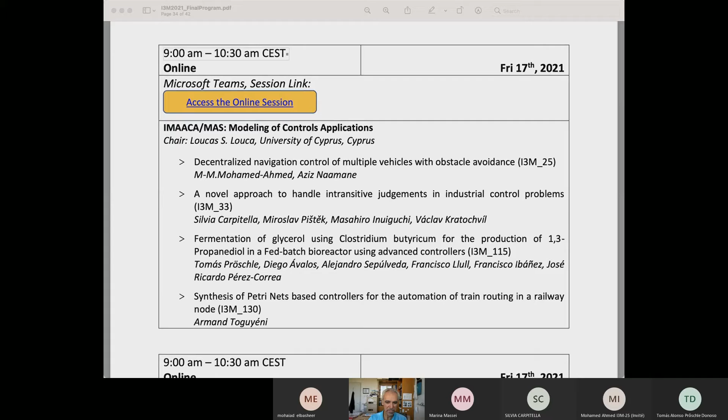Good morning, ladies and gentlemen. My name is Mohamed-Ahmed. I will present the topic with obstacle avoidance. This paper prepared by Mohamed-Ahmed and Aziz Naamane, University, Laboratory of Systems. This presentation is divided.

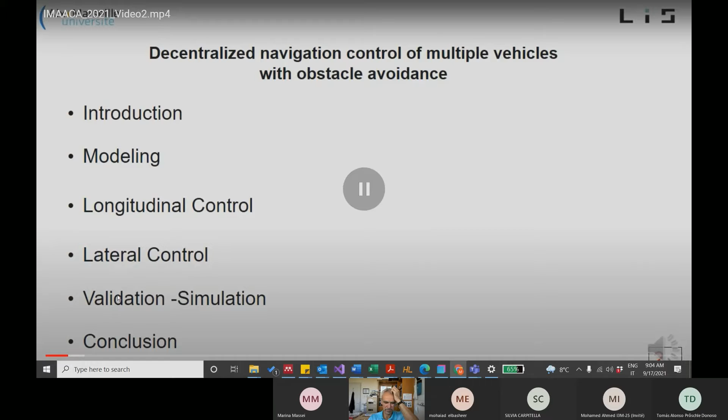Good morning, ladies and gentlemen. My name is Mohamed.

Okay, I think we're ready to start. Hello, everybody. Good morning or good evening to Tomás from Chile. As he informed me, it's 4 a.m. there. Good morning to us, and hopefully you can find the energy to answer some questions at the end. So welcome to the session.

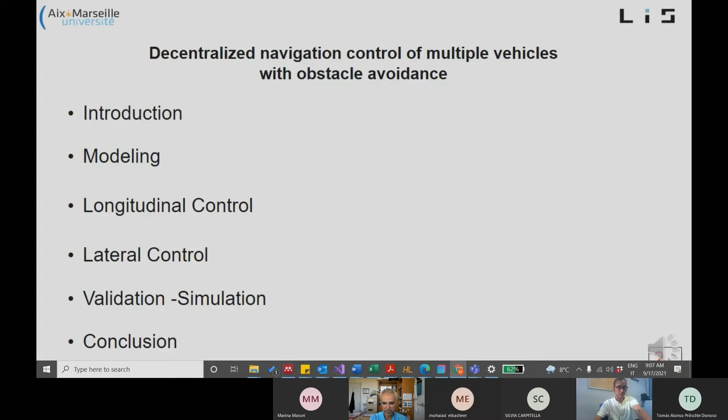For this, for the lateral movement, the convoy is controlled to avoid the obstacle. This obstacle can be mobile or immobile in the same trajectory, when we have another vehicle in the trajectory, multi-line or one line.

For the modeling part, we have the description of the vehicle. This represents the longitudinal movement, lateral movement, and yaw movement. Gx represents the longitudinal displacement, Gy the lateral displacement, and here we have two frames, the reference frame and the frame of the vehicle.

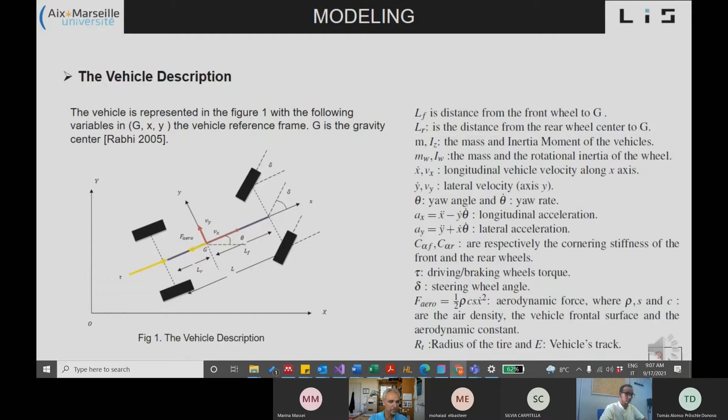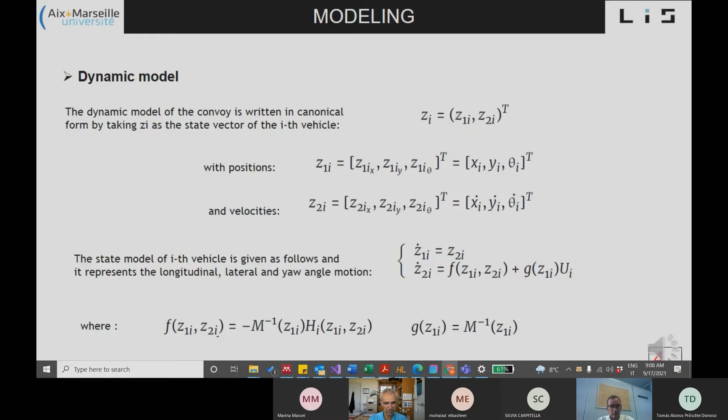To present the state model of the convoy, Z represents the state vector, for example Z1 and Z2. Z1 represents the position and Z2 represents the speed of the convoy. Here we have the state model of the convoy for the nonlinear systems. F and G are defined here: this represents the inertial matrix and this represents the vector representing the nonlinear dynamic of the convoy.

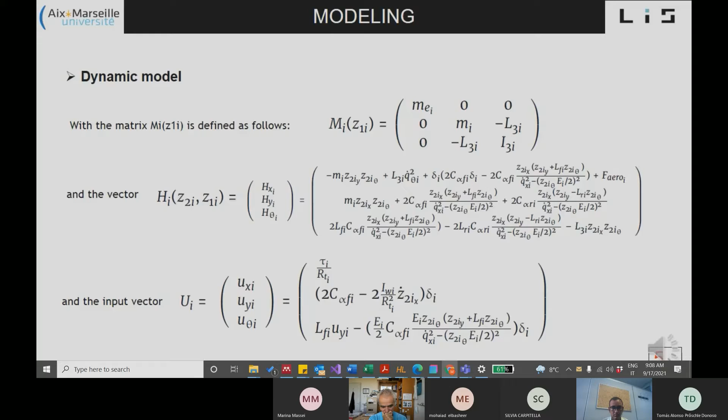Here we have the input for the i-th vehicle. We have 3 inputs for the longitudinal, lateral, and yaw movement. For the longitudinal, we control the convoy by the torque, and for the lateral movement, we control the convoy by the steering angle. The aim of the longitudinal control of the convoy is to follow the speed of the leader.

Here we use the global decentralized approach. We assume we have the information of the leader and the neighbor vehicle to control the longitudinal movement of the vehicle. Firstly, we define the error between neighbor vehicles, for example between the i-th and the i-1 vehicle.

Here, S represents the curvilinear abscissa for the i-th vehicle, and here for the preceding vehicle. ld represents the safety distance to avoid collision between the vehicles.

Here we have the two speed errors: the error speed between the neighbor vehicle, and the error between the i-th and the leader vehicle.

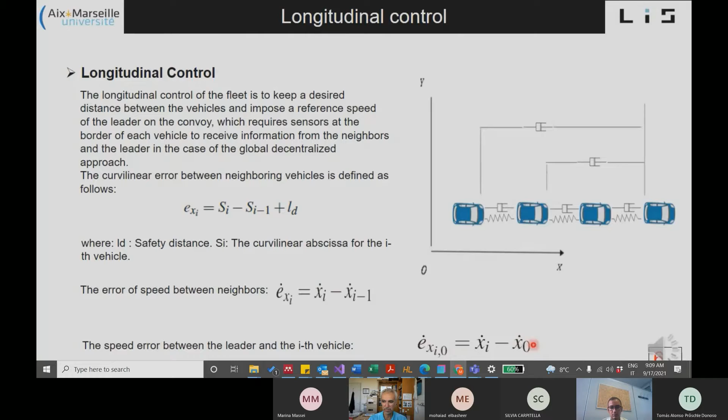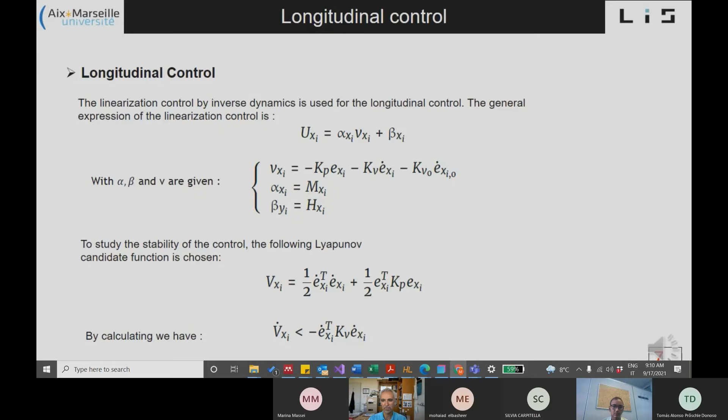To answer the stability, we use the Lyapunov approach. For example, here the V represents the Lyapunov function candidate based on the speed, speed error and the position error, and we derive this function to answer the stability. For example, here V dot is negative, so we can answer the stability in closed loop.

For the lateral control or the lateral movement of the vehicle, we have two aims. For example, here we generate the trajectory to avoid the obstacle. Here, for example, this is the obstacle. This is the longitudinal safety between the convoy and the obstacle. Here we have the Γ represents the position of passage to attain or to generate the obstacle avoidance maneuver.

For this, when we generate the trajectory, we use the sliding mode control to follow the trajectory generated by the sigmoid function. For example, when we use the sliding control, we have two parts: the sign function, the robustness part of the sliding mode control. We have two parts, the equivalent control and the sliding robustness control based on the sign function.

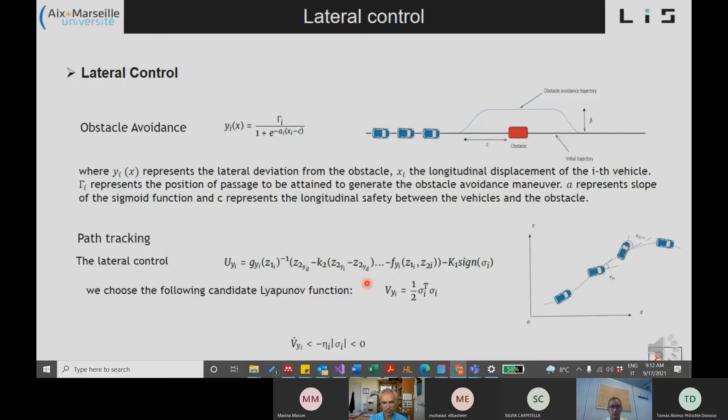And to study the stability, we can use the Lyapunov function based on the sliding surface to answer the stability for the lateral movement. So we have to generate the trajectory and to follow the trajectory generated by the sigmoid function.

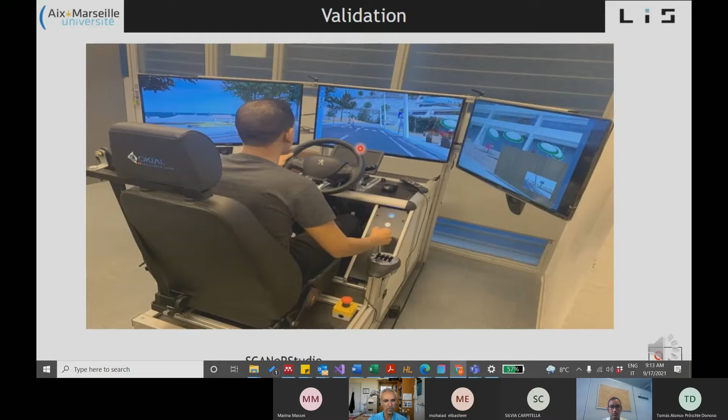The validation of the different approaches, we use the SCANeR Studio. The SCANeR Studio, we coupled with the MATLAB Simulink, so we can control the convoy to follow the trajectory. We can control the convoy in real time to avoid the obstacle. We have two scenarios.

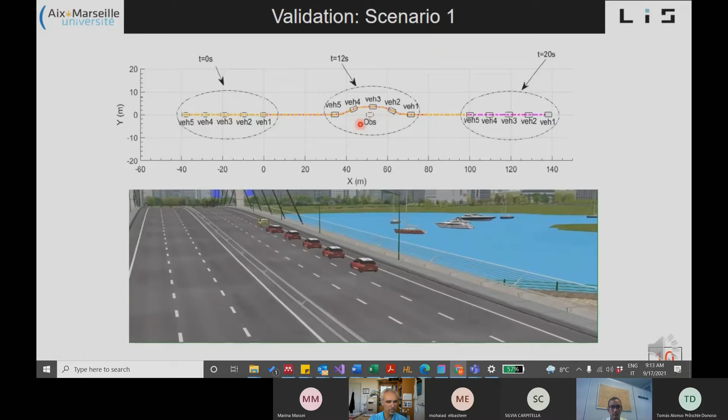The first scenario, the obstacle is immobile. Here we have the initial position of all vehicles, the convoy, and the initial position of the obstacle. The speed of the obstacle equals zero.

So when the vehicle, the convoy, arrived on the obstacle, the sigmoid function will generate the trajectory, and the sliding mode control will control the convoy to follow the trajectory generated by the sigmoid function, avoiding the obstacle. So afterward, all vehicles are controlled to return to the reference trajectory. Here we have three times: equal 0, 12, and 20.

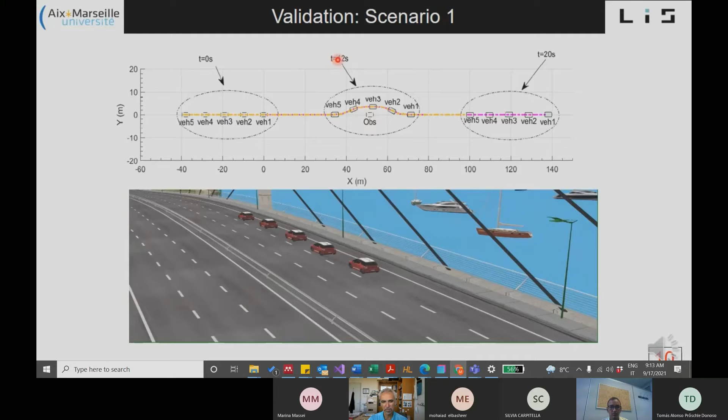For the next scenario, the obstacle is mobile. Here, for example, we have the initial position of the vehicle. Here we have the initial position of the obstacle, and the obstacle moving for t equal 22 seconds. Here represents the position of the obstacle, and the vehicle, when arrived on the obstacle, will be avoiding using the trajectory generated by the sigmoid function and the sliding mode control.

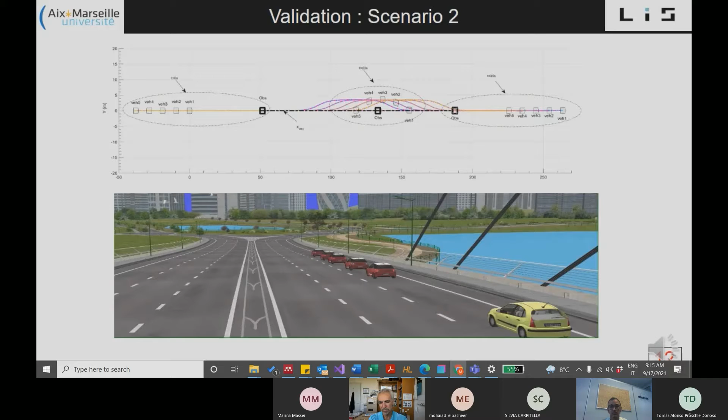So we have three positions here: the first position, here the second position, and here we have the third position of the vehicle. So the obstacle is a vehicle moving with a speed slower than the speed of the vehicle.

So here we have the longitudinal speed of the convoy, the longitudinal speed of the obstacle, and here we have the vehicle distance of 6 meters. Here we have the lateral error, and here we have the curvature of the trajectory. Here we have the steering angle, lateral acceleration, lateral speed, and the yaw rate.

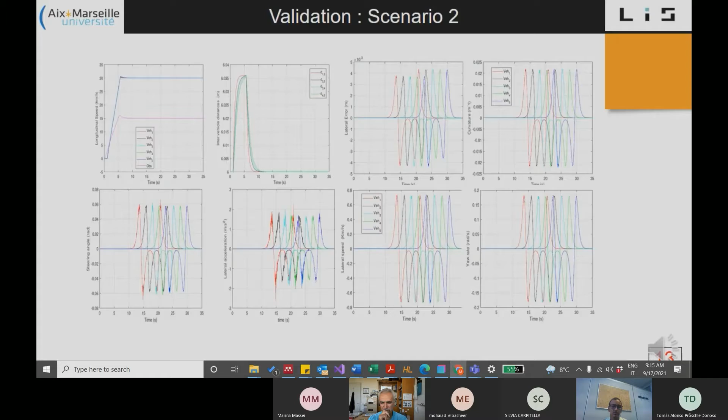To conclude this presentation, we have proposed the longitudinal and lateral control of the convoy of multiple vehicles. For the longitudinal, we have proposed a global decentralized approach using nonlinear control using the information of the leader and the neighbor vehicle. For the lateral control, we have proposed the sigmoid function to generate the trajectory to avoid the obstacle, and using the sliding mode control to follow the trajectory generated by the sigmoid function.

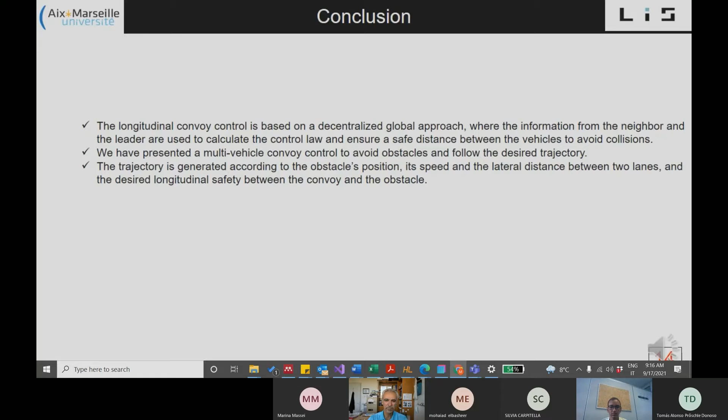So the convoy, the vehicles, are controlled to avoid this obstacle. This obstacle can be mobile or immobile. Thank you.

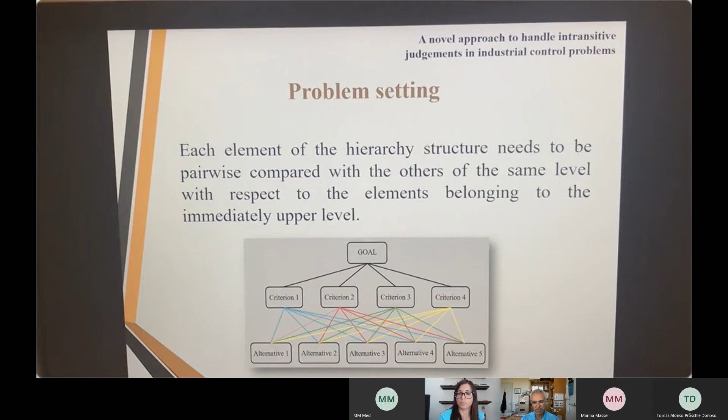Each element belonging to the same level of the structure needs to be pairwise compared with elements of the same level with respect to each element on the immediately upper level of the same structure. Comparisons are numerically translated by means of dedicated scales, such as the 9-point scale proposed by Saaty.

All these numerical evaluations are collected in the so-called pairwise comparison matrices. An example is reported on the right side of this slide. Matrices have to respond to some mathematical properties. First, they are positive matrices, and they have to be homogeneous, meaning each element, when pairwise compared to itself, has an evaluation of indifference.

Also, matrices have to be reciprocal. This means it will be necessary to collect just a number of evaluations corresponding to the number of cells lying over the main diagonal of the matrix.

Very important, pairwise comparisons have to be consistent. This means judgments expressed by experts have to be as coherent as possible. Consistency is a desirable property that reciprocal matrices don't always have.

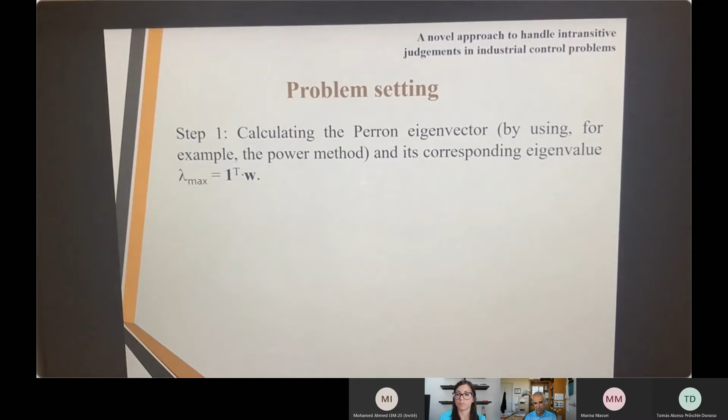The analytic hierarchy process provides a measure of consistency by means of the so-called consistency ratio. The first step consists in calculating the Perron eigenvector of the matrix and the corresponding eigenvalue. Then we compute the consistency index using the eigenvalue previously calculated, and eventually we can compute the consistency ratio as shown in this slide.

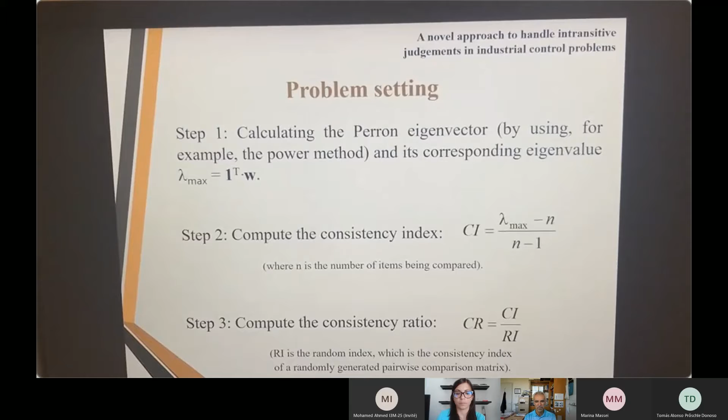This slide reports the complete process of getting consistency through the linearization process. By means of this process, we calculate a matrix that can be defined as perfectly consistent, and it is the closest matrix to the matrix of input.

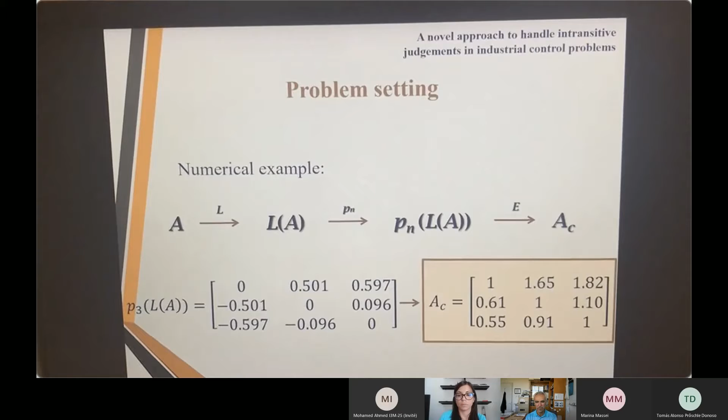As a quick numerical example, for a matrix of size 3 by 3, we calculate the logarithmic transformation and the orthogonal projection onto a linear subspace. Then, by means of a simple exponential operation, we get the final closest consistent matrix. We have to observe that this matrix is just a synthetic result, and it can be very different with respect to the original matrix.

This is the reason why it is important to establish a feedback-based relationship with the expert, who eventually has to agree with the final evaluations.

To avoid all these problems, we developed a new approach to deal with inconsistent judgments. In particular, this approach can be summarized by means of 4 different steps.

First of all, we are going to build the matrix of pairwise comparison for criteria. Then we are going to build matrices of pairwise comparisons of alternatives with respect to each criteria of the problem. Then we are going to aggregate all these matrices into a single matrix and calculate the logarithmic transformation to eventually obtain the maximal preferred elements, something that will avoid to get a proper final ranking of alternatives.

So the first step, for example, as we can see, we are going to pairwise compare criteria with respect to the general goal. Then we are going to pairwise compare alternatives with respect to each criteria. So we will have a number of matrices equal to the number of evaluation criteria involved. Then all these matrices will be integrated into one.

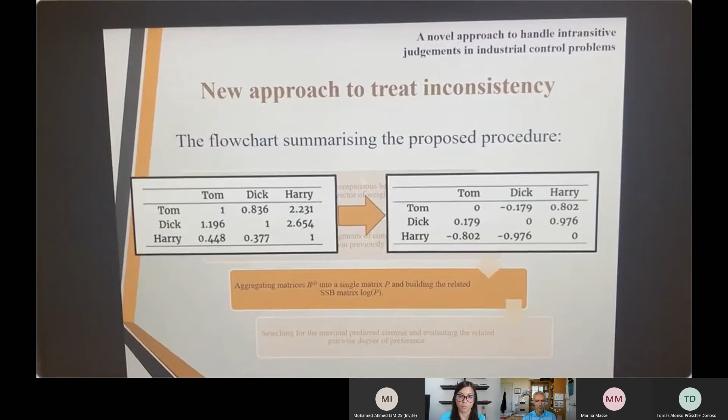The logarithmic transformation will be calculated, and we are going to obtain something called the final distribution of preference, calculated as shown in this slide.

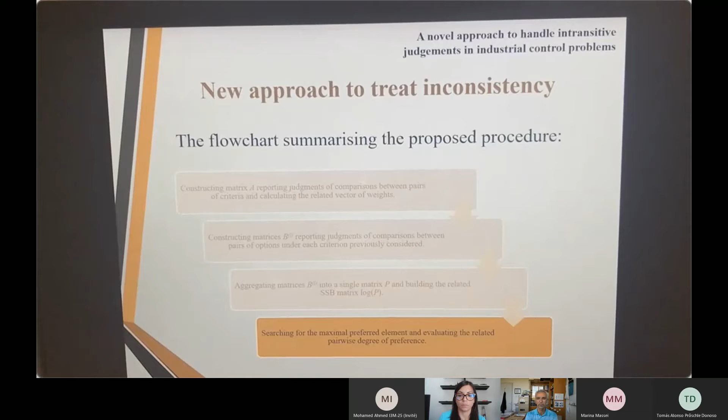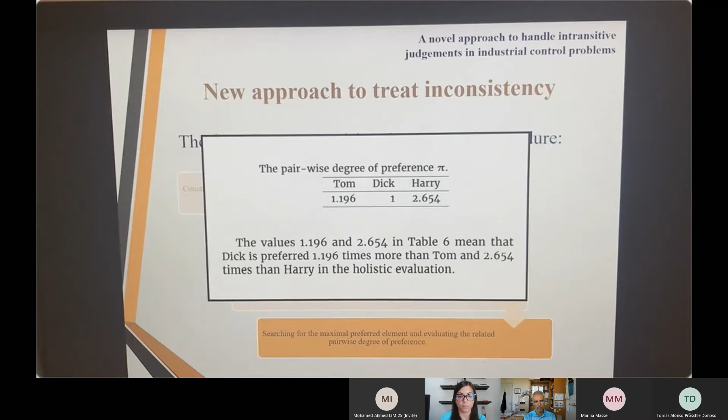At the end, we are going to search for the maximal preferred element and evaluate the related pairwise degree of preference in this way. This allows us to highlight the alternative that is more likely preferred over all the other ones. And also, by calculating the pairwise degree of preference, we can understand to which degree of intensity these alternatives should be preferred to the other ones.

So, case study. We are going to present a case study that deals with the topic of risk management in the food industry. In particular, we aim to prioritize interventions of risk management to guarantee the safety of operators that work with a core subsystem belonging to the packaging plant of a food company.

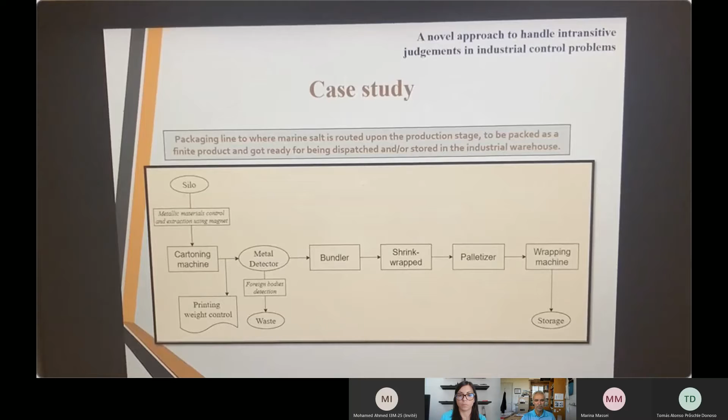This food company is located in Italy and is devoted to the production and commercialization of marine salt for alimentary use. This slide reports the main equipment involved in the process as a graphical representation of the subsystem of reference.

So, summing up, the decision-making problem has the goal of prioritizing risk interventions aimed at optimizing the performance of the system. We have to deal with 4 evaluation criteria.

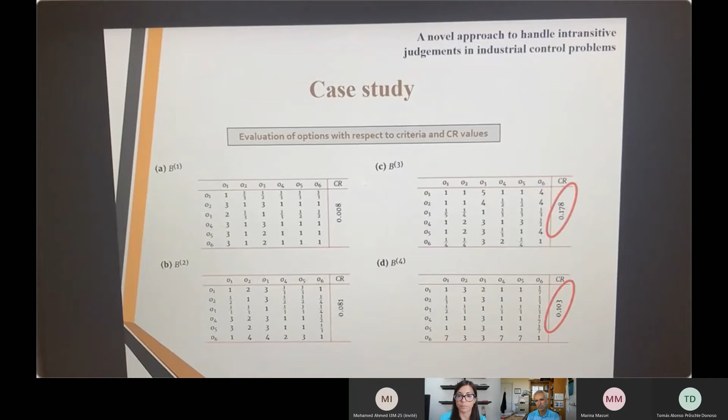So actually these matrices correspond to the evaluation of alternatives under each criterion, and as we can observe, the third and the fourth matrices are not consistent within the limits allowed by the methodology.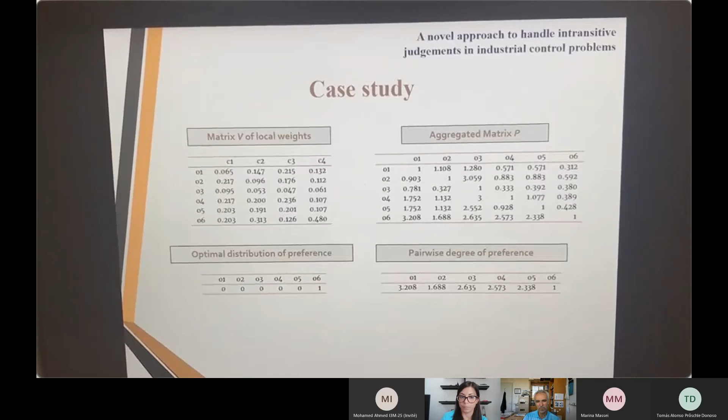So we are going to aggregate all these matrices into a single one, then we are going to calculate the matrix of local weights, and then we are going to establish the pairwise degrees of preference and the optimum distribution of the same preference. In this way, our approach suggests scheduling with priority the 6th intervention, by increasing the frequency of sanitizing interventions on the machines operating in the core subsystem of interest.

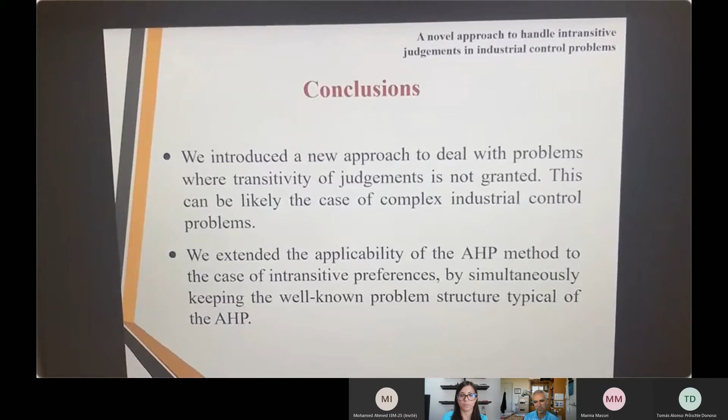To conclude our presentation, we can affirm that our new approach, which deals with problems where transitivity of judgments is not granted, can be applied for the management of complex industrial control problems. We extended the applicability of our process within the framework of the analytic hierarchy process methodology.

Also, this approach has been applied to a real-world case study on risk management in the food industry, for potentiating system control and human safety by relying on original expert judgments. The following risk management actions have been scheduled, starting with increasing the frequency of sanitizing interventions.

I thank you all for your kind attention.

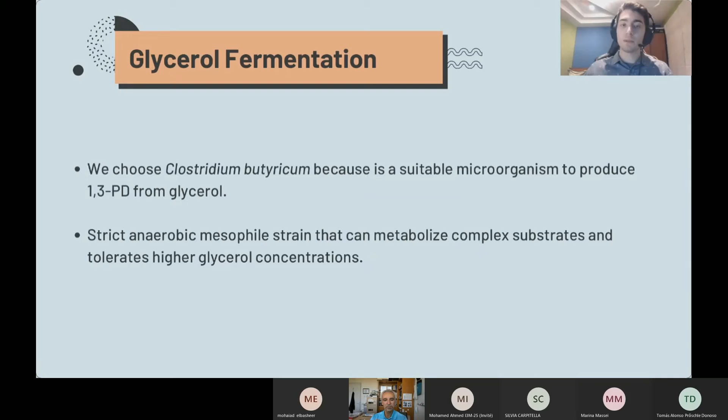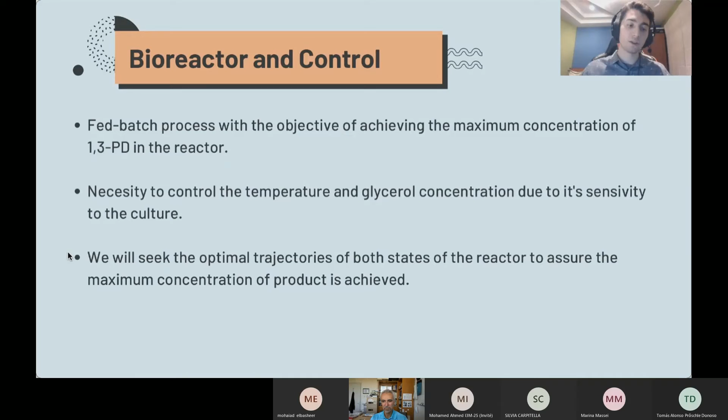And a higher productivity. For the bioreactor and control, we use a fed batch process with the objective of achieving the maximum concentration of propanediol possible. Given this, there is a necessity to control the temperature and glycerol concentration due to its sensitivity to the culture. We will seek the optimal trajectories of both states of the reactor to assure the maximum concentration is achieved.

For this process, we identify two major disturbances. The first is the variation of the glycerol inlet concentration due to its crude state. The second is the variation of coolant inlet temperature due to possible changes in room temperature from the day and night cycle. Therefore, it's necessary to design a robust control to overcome these disturbances and achieve the control objective.

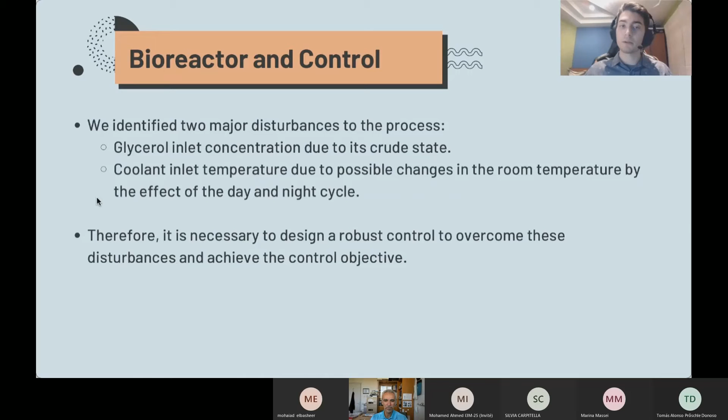Here we show the piping and instrumentation diagram. We have a 5-liter reactor with a peristaltic pump for the glycerol feed, controlling the glycerol concentration in the reactor, and 2 peristaltic pumps for the hot and chill water, controlling the temperature of the reactor.

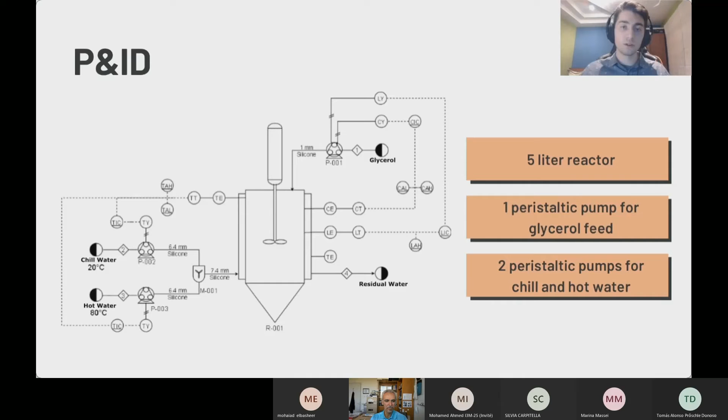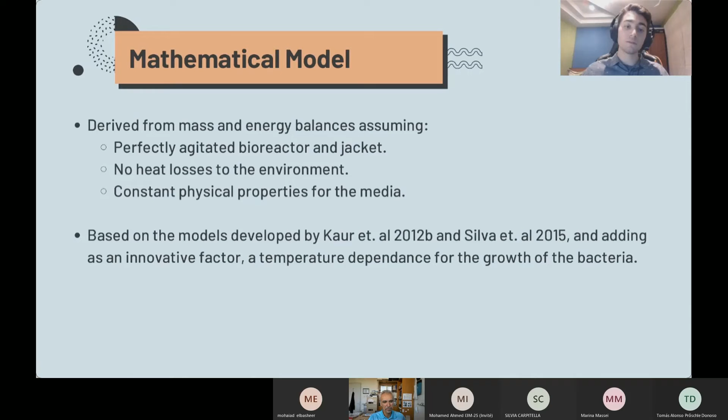Regarding the mathematical model, it's derived from mass and energy balances, assuming a perfectly agitated bioreactor and jacket, no heat losses to the environment, and constant physical properties for the media. It's based on the models developed by Kaur et al. 2012b and Silva et al. 2015, adding an innovative factor of temperature dependence for the growth of the bacteria.

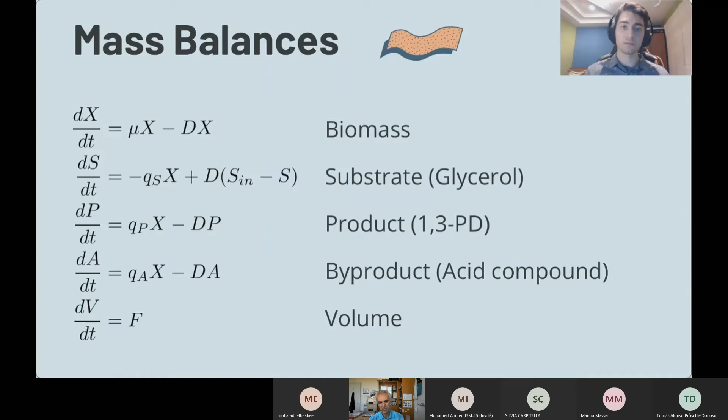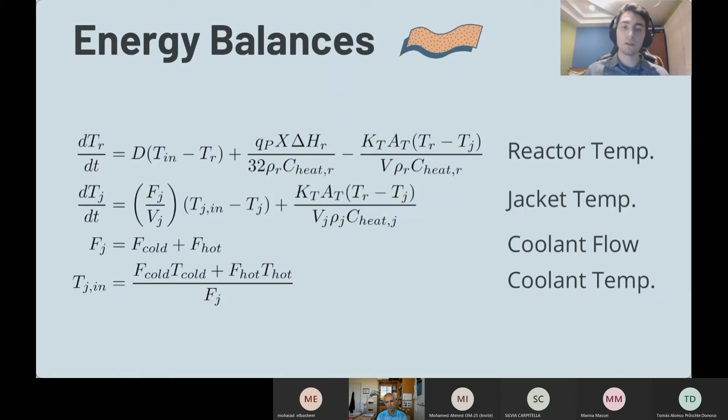For the mass balances, we have balances for biomass, substrate, the product, and a byproduct, which is an acid, and a volume balance because it's a fed batch reactor. Then for the energy balances, we have a reactor temperature balance, which takes into account the heat produced by the microorganism in the production of propanediol, then the balance for the jacket temperature, and the coolant flow and coolant temperature because it's a mix of 2 streams.

For the constitutive equations, the growth rate takes into account the temperature and the concentration of inhibitory compounds, which are substrate, product, and acid. Then there are the substrate consumption rate, propanediol production rate, acid production rate, and a dilution rate.

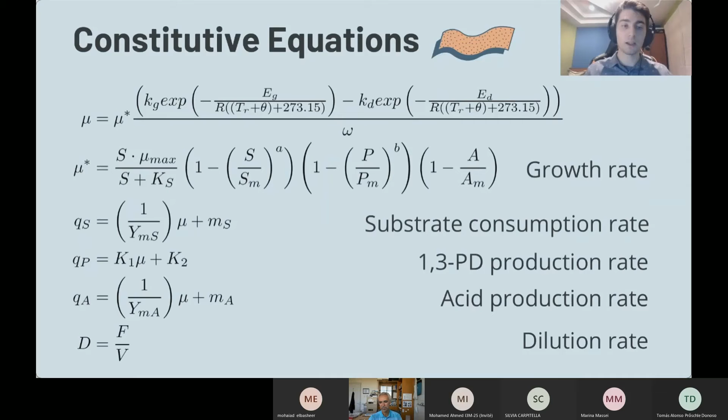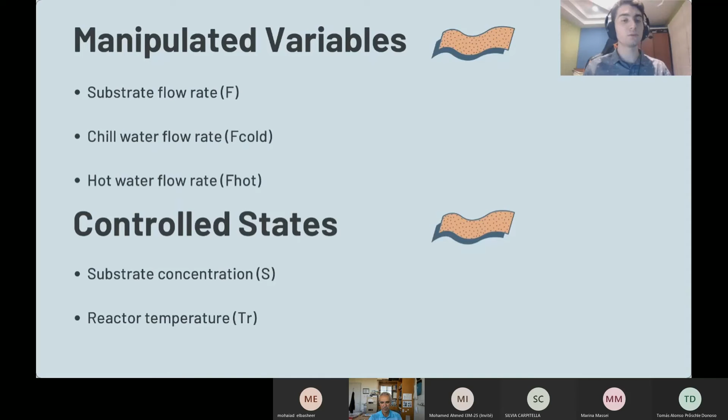With the mathematical model presented, we're going to manipulate these variables: the substrate flow rate, the chill water flow rate, and the hot water flow rate, to control the states of substrate concentration and temperature of the reactor.

In order to maximize the concentration of propanediol in the reactor, the orthogonal collocation on finite elements procedure by Carey and Finlayson was implemented, which allows us to calculate the optimal trajectories for the manipulated variables. This method allows the differential algebraic equation system to be completely discretized, approximating the control variables and the states via polynomial functions at each time interval.

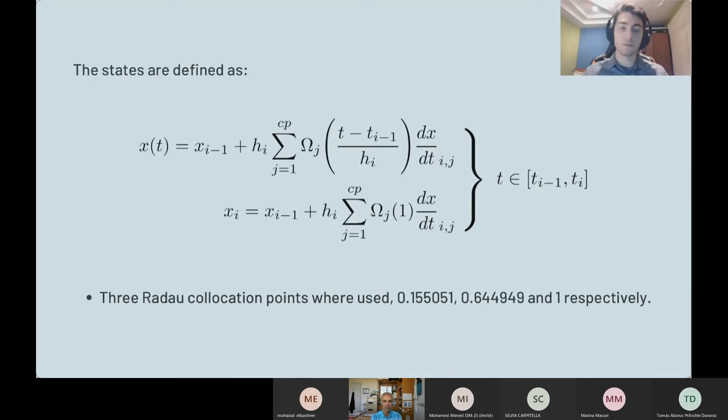These states are defined as such, with 3 Radau collocation points used: 0.15, 0.64, and 1 respectively. Then we can formulate the dynamic optimization problem, which is the maximization of the product at the final time, subject to the differential equations and the algebraic equations. This problem was solved using AMPL software.

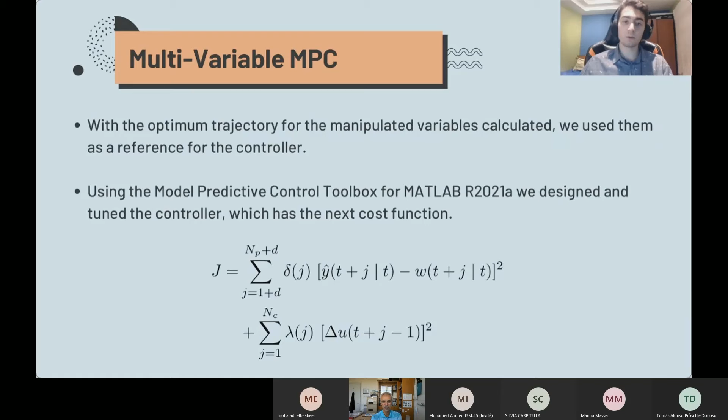Now that we have the optimum trajectory for all the manipulated variables, we will use them as a reference for the controller. Using the Model Predictive Control toolbox for MATLAB 2021A, we design and tune the controller, which has the following cost functions, where NP and NC are the prediction and control horizon, set to 20 and 10 respectively. The minimization problem is as follows, where U is the manipulated variable.

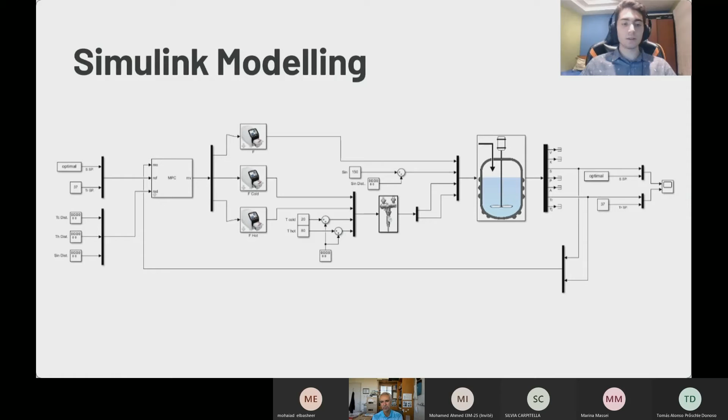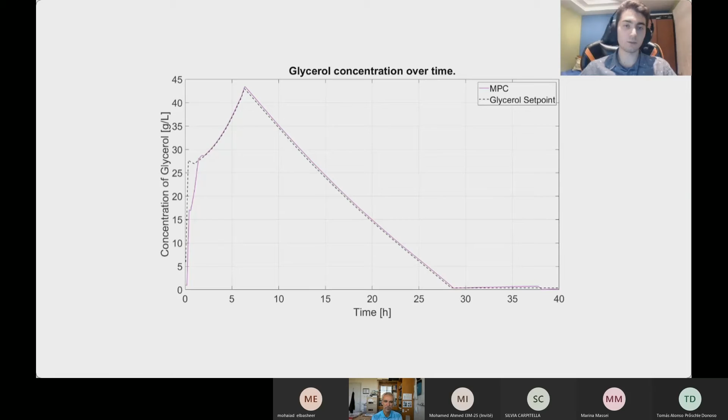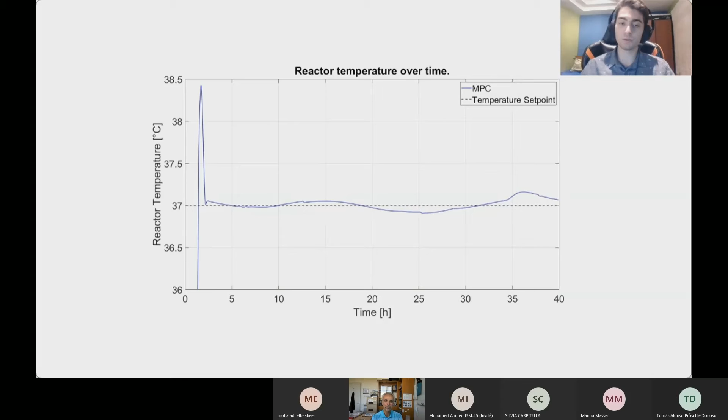Then, for the temperature control loop, we notice there is a little overshoot at the beginning. That's because of the necessity to increase the temperature from 25 Celsius to 37 Celsius. In spite of this, it follows the set point with precision. The action of the controller is as follows, where the temperature is generated by the mix of a hot water source and a cold water source. We see how the temperature at the beginning is higher and then decreases.

Finally, the profile inside the reactor is this, and we can see how we achieve 75 grams per liter in a total time of 40 hours.

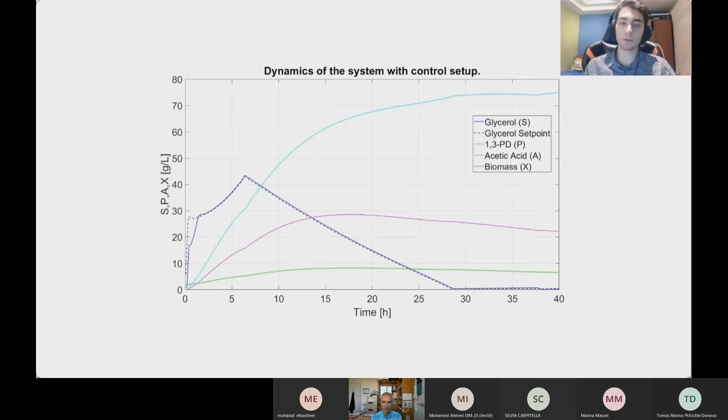Regarding the simulations and the dynamics of the system, the set point is followed with great effectiveness in both control loops, therefore achieving the maximum product possible for this set of parameters. The MPC design is robust and overcomes all the disturbances in the system.

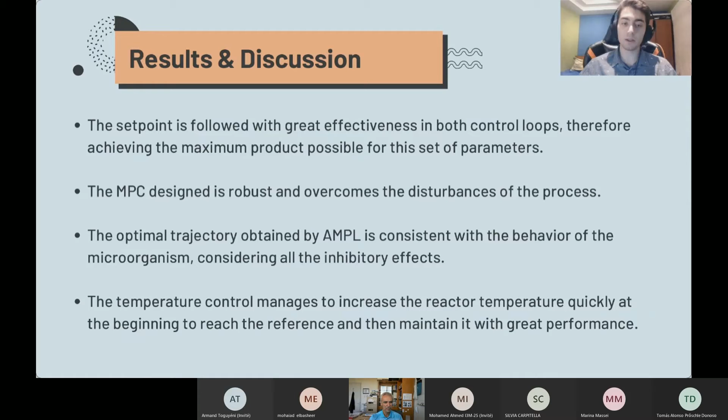The optimal trajectory obtained by AMPL is consistent with the behavior of the microorganism, considering all the inhibitory effects, and the temperature control manages to increase the reactor temperature quickly at the beginning to reach the reference and then maintain it with great performance.

Finally, for the conclusions of this project, the implemented controller achieves the objective in a robust and efficient way. The maximum concentration reached was 75 grams per liter of Propanediol in 40 hours, and this technique proved to be effective and has a great potential for processes that are well identified, since the orthogonal collocations of finite elements method, along with dynamic optimization, allow us to find the optimal trajectory and use it as a reference. Thank you very much.

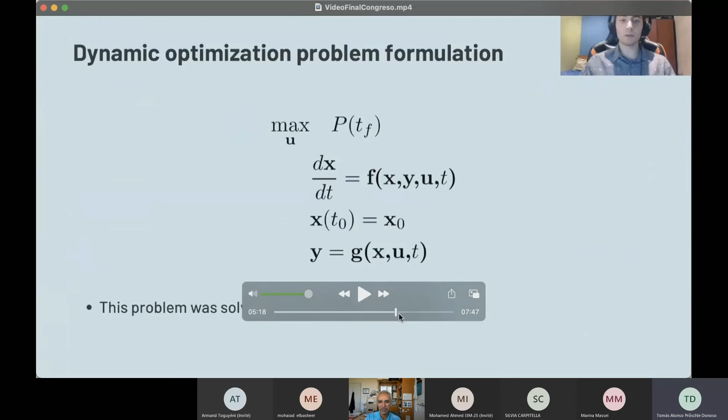In your controller, did you consider any saturation of the actuators? For example, you had a flow rate. Actually, if you can switch to the graph, the coolant pumps.

So that's part of the process. Because we start at 25 degrees Celsius and the optimum temperature is like 37. So we need to reach quickly that state of optimality, and if we didn't restrict the hot pump, we got a massive overshoot. So that's the need.

And that saturation you defined by trial and error, or do you have some method? Yes, that was manually tuned.

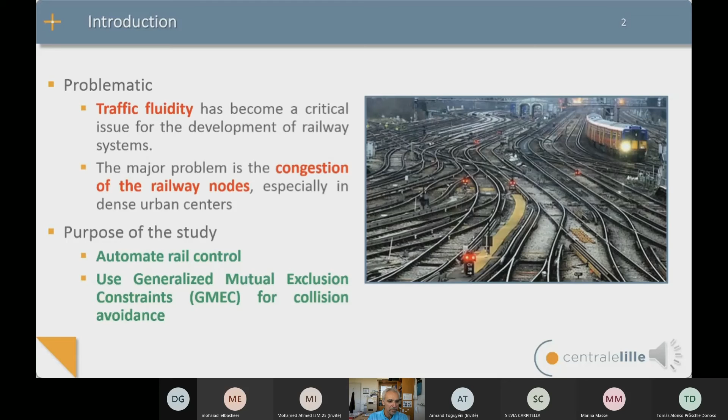In the framework of Petri Nets, this can be based on the technique of generalized mutual exclusion constraints that allow bad state avoidance. In this presentation, I will first introduce state avoidance principles and S4PR, a class of generalized Petri nets. Then I will present a new technique for constraint transformations in order to obtain admissible constraints to apply state avoidance based on multiple places in the context of partial observability and controllability. After that, I will apply the obtained result to a railway use case.

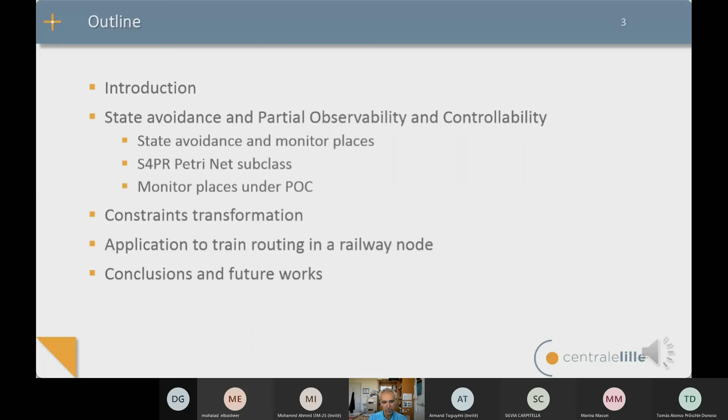In the framework of Petri Nets, state avoidance can be obtained by the technique of generalized mutual exclusion constraints. A GMEC is a linear constraint that defines the legal state in the space of reachable states of the initial model. This linear constraint defines the limit number of tokens that can be reached in a subset of places in the model.

The vector W defines the limit for each place, in the form of a monitor place, the limit for each place with respect to an absolute limit B. When the constraint is admissible, it can be translated into the form of a monitor place that will control the crossing of some transitions of the model.

Assume we want to limit the number of tokens in place P2 and P3 to 1 token, given by the constraint given by these equations. We obtain this value for W and this value for B. So we can generate the monitor place PV that controls the firing of transitions T1 and T2.

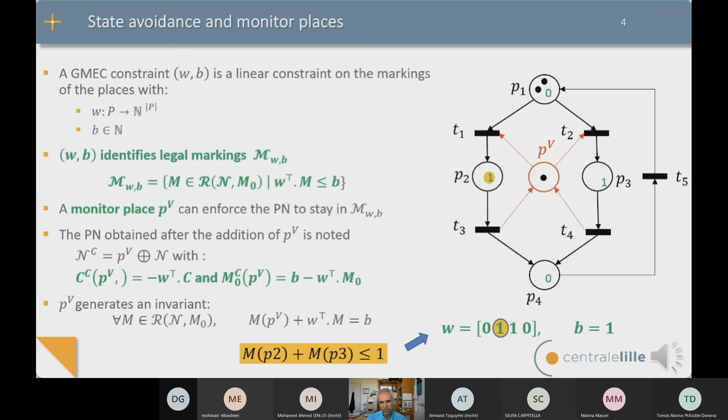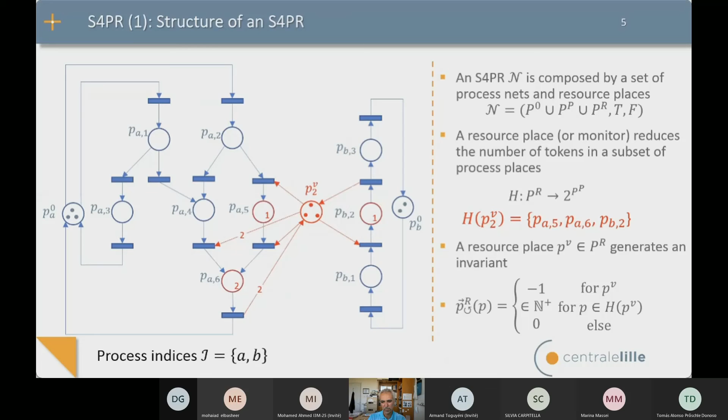In fact, in many systems, some events cannot be observed or some events cannot be controlled. In Petri Nets models of such systems, we distinguish three types of transitions: controllable transitions, which we will represent in blue, uncontrollable but observable transitions, represented in red, and uncontrollable and unobservable transitions, represented in white.

From control theory, it's not admissible for a monitor place to control uncontrollable transitions. And it's also not admissible for a control place to observe the firing of unobservable transitions.

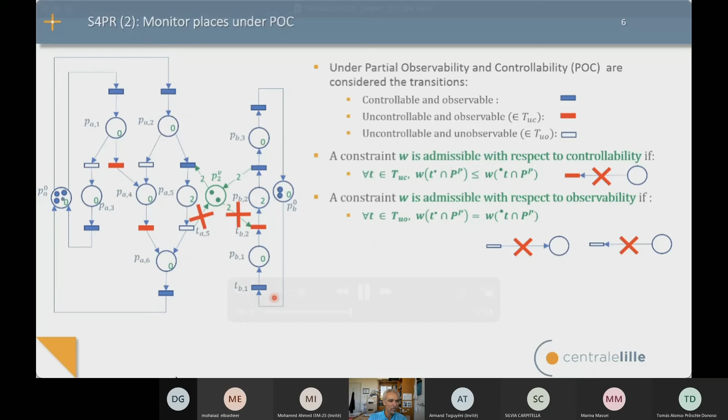If we consider this example, we can see that we have an arc from place PV2 to transition TB2. This is forbidden. Also, we have an arc from transition TA5 to place PV2. This is also forbidden. We say that the constraint is not admissible. When constraints are not admissible, we can perform transformations of the constraints to obtain constraints that are admissible.

When a constraint is not admissible from the control point of view, the idea is to move back, to the first controllable transition, the arc linking the monitor place to the uncontrollable transition. For example, if we consider in the figure the case of PV2, we have an arc from PV2 to TB2, but TB2 is an uncontrollable transition. So the idea is to move this arc to TB1, which is a controllable transition.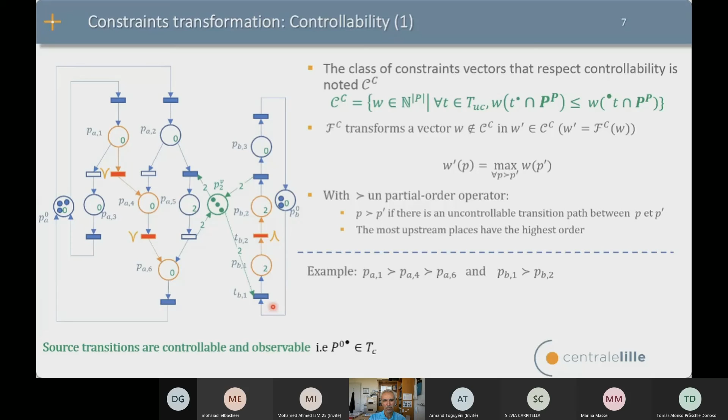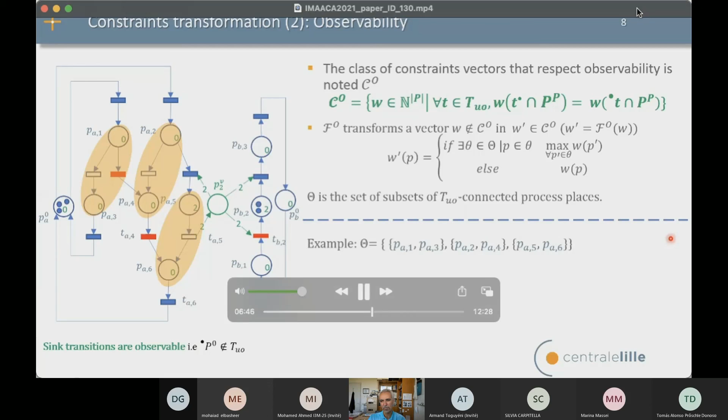Similarly, if a constraint is not admissible from the observability point of view, it is necessary to move the arc linking the unobservable transition to the monitor place. This arc must be moved to the first observable transition on the path from the unobservable transition to the sink transition of the process. This is required to propagate the constraint to all the path places. This is the role of the FO function.

In our illustrative example, we have three unobservable transitions. If we consider again the case of PV2, we can see that we have this arc that connects TA5, which is not observable, to PV2. So we have to move this arc to TA6. But in this case, we can see that it's necessary to add a new arc from PV2 to TA4. But TA4 is not a controllable transition. So this shows that solving one constraint can imply problems for another transition.

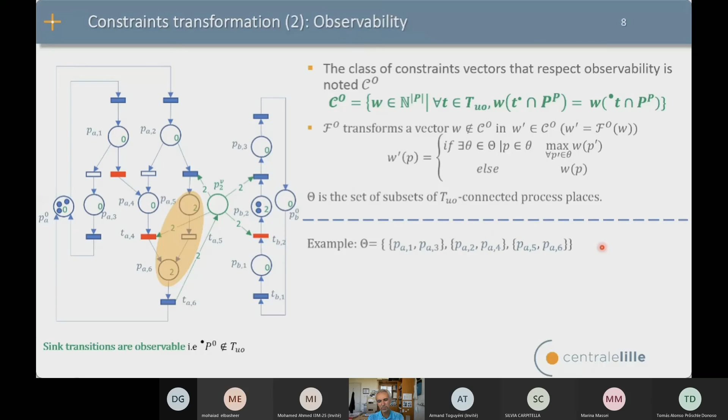Therefore, solving a non-admissible constraint can result in a new non-admissible constraint. It is therefore necessary to iteratively use the functions FC and FO until we have propagation of the constraint to the different places of the model, which allows us to respect both the controllability and observability constraints. This is the role of the FCO algorithm.

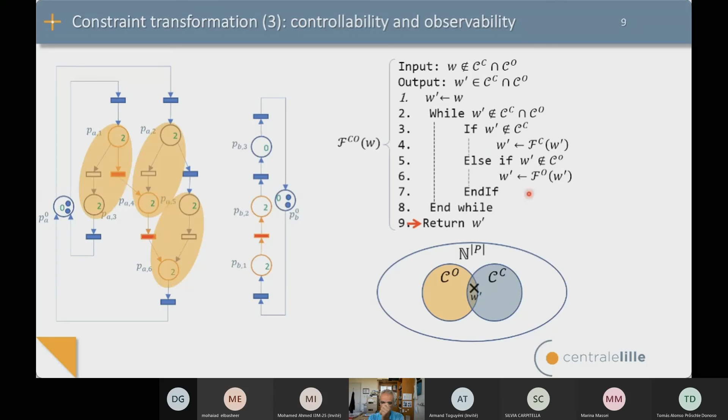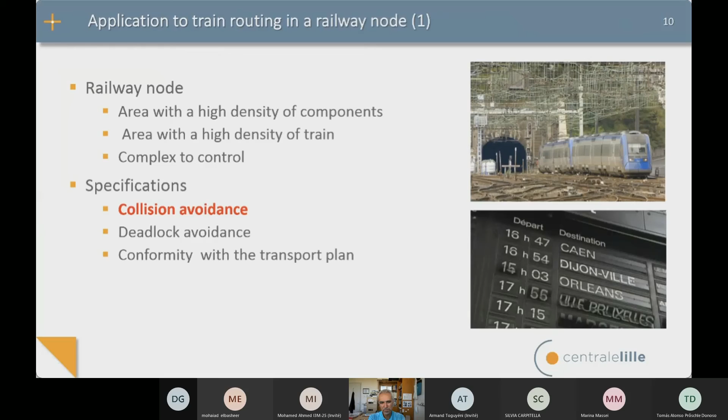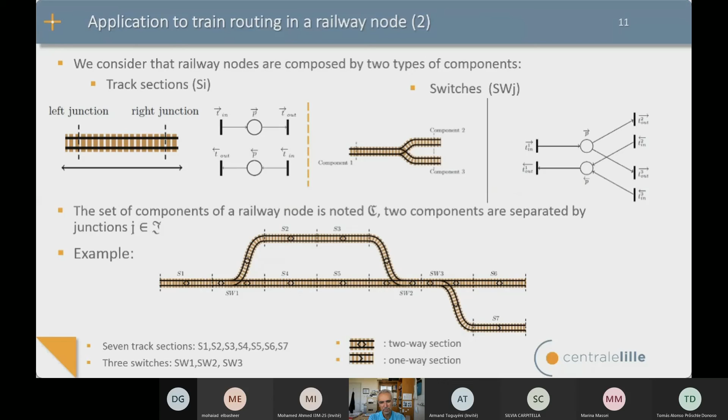Now we apply the previous theory to the synthesis of a controller for the automated control of railway networks. In this study, we are focused on solving the collision avoidance problem. A railway system can be broken down into elementary components such as track sections and switches. To each component, we can associate a generic Petri Nets model. Thus, the resulting model of a system is obtained by concatenating the models of the different components that compose the system.

Various instruments are placed on the track in order to locate the trains and to transmit the authorizations of movements, allowing them to advance. When a track has two directions, the instrumentation must be doubled in order to adapt it to each direction of traffic.

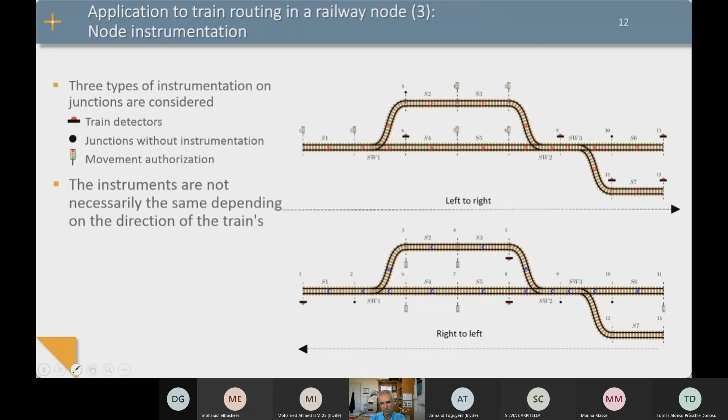A crossing characterizes the set of routes originating from a single entry into a railway node. To model a railway node, it is necessary to model each crossing in the form of a Petri net by collecting the elementary models of the components of the system.

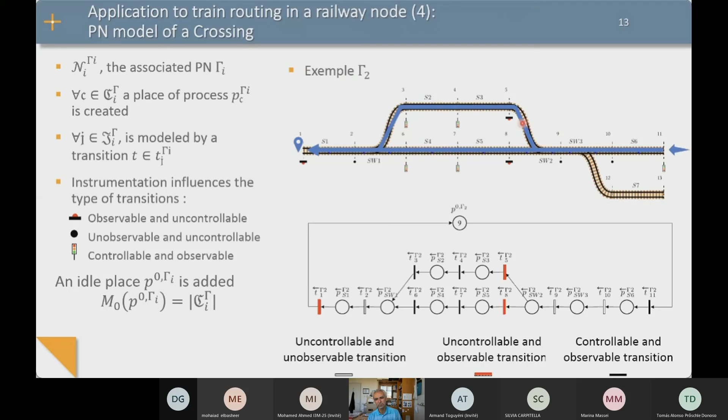In the study, we can distinguish two crossings, gamma 1 represented in red and gamma 2 represented in blue. Each of these crossings has a corresponding Petri net.

Separate modeling of crossings can lead to collisions between trains at the level of the components used by each crossing. In order to avoid collisions, it is necessary to define the constraints for each component.

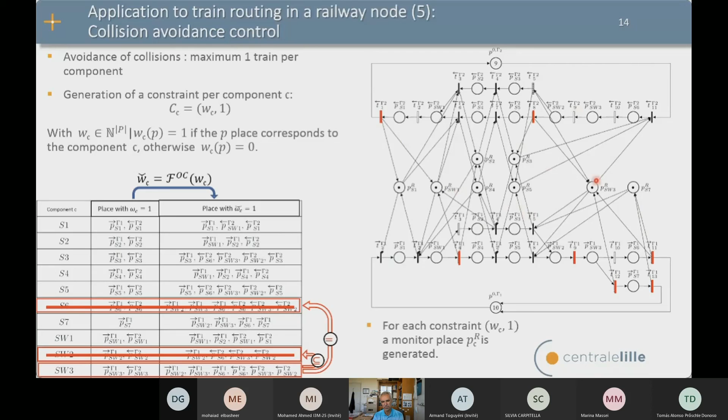To conclude, we have proposed in this study a method for the generation of monitor places in a Petri net under partial observability and controllability. This allows us to model a controller to control trains in a railway node.

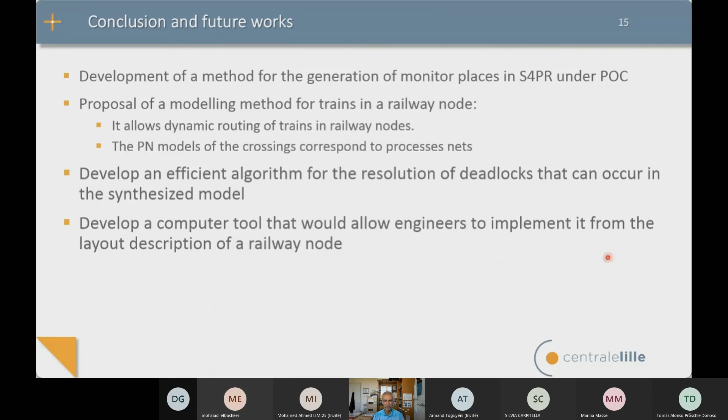But some deadlocks can occur in this model, so it is necessary to develop an efficient algorithm to solve deadlocks in these models. In the future, we also want to propose computer tools to allow engineers to implement it from layout descriptions of railway nodes.

Thank you for your attention.